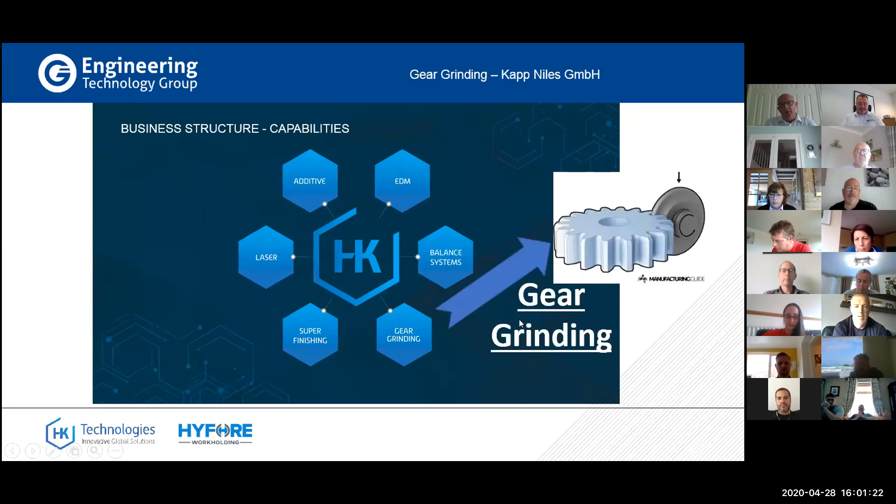Within HK Technology we have 6 core parts of the business: balance systems, EDM technologies, additive manufacture, laser marking, super finishing, and gear grinding. It's the gear grinding that I'd like to talk about this afternoon.

Our partner when it comes to gear grinding with HK Technologies is a company called Kapp Niles, a German company founded in Coburg in 1953. Now, for Graham Thomas's purposes, Coburg is also the birthplace of a certain Prince Albert, so I'm sure he'd like to visit there at some stage.

The second part of the business is the Niles part of Kapp Niles, which was founded in 1898. Niles ended up behind the Berlin Wall when Germany was split after the Second World War, and when the wall came down in the 90s, they found that under capitalism they struggled as a business, so they were purchased by Kapp in 1997, and the company Kapp Niles was founded.

The way the two businesses worked previously, Kapp used to produce gears up to a diameter of 1 metre, and Niles would produce gears above 1 metre. So by bringing the two companies together, you had a company which now offers a wide range of gears, from the smallest to the biggest capacity that's out there.

In 2017, Kapp Niles also founded a separate division of metrology, gear measurement. So from being a global market leader in the manufacture of machine tools and finishing tools of gears and profiles, by bringing in metrology they now become a total turnkey supplier for gear grinding. HK have been working with Kapp Niles since 1997.

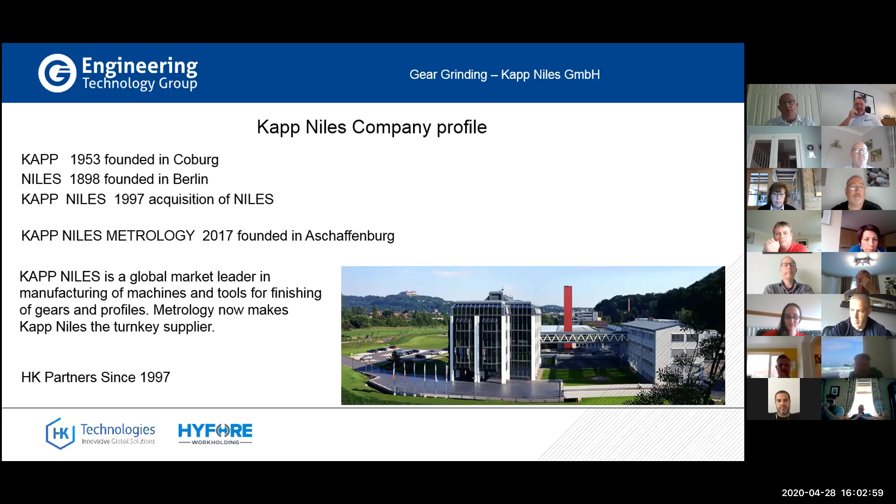So what is a gear? A gear is a wheel that works with other toothed wheels to alter the relation between the speed of a mechanism and its driven parts, the torque of a mechanism and its driven parts, or the direction of drive and force within a driven mechanism.

To put that into perspective, when you drive your car, if you want to go faster you change the gears. By driving through the system and changing the speed of the main driving parts, the smaller gears, you can alter the speed of the car. In the same way, by going down the gears, you can increase the torque from the car.

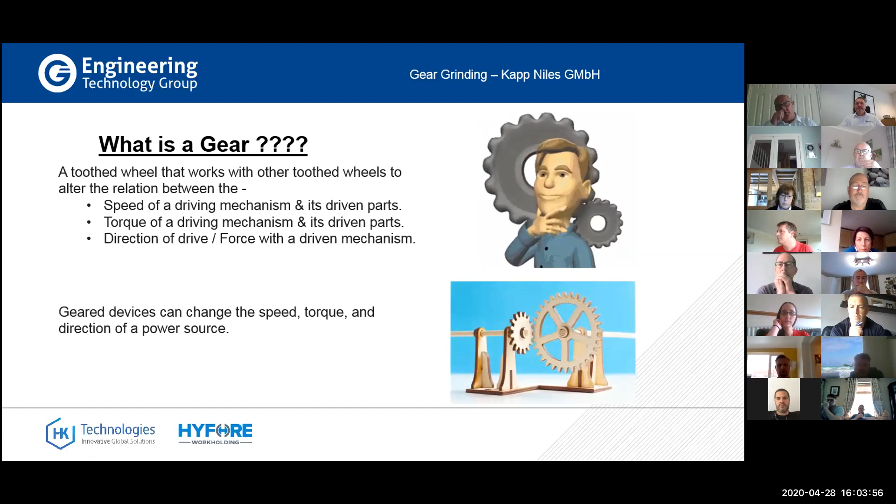Down the bottom here we also have a little animation which shows how we can use gears to change the direction of force within a driven mechanism. So gears can be used to change speed, torque, and force within a power source.

Just to give some examples of some types of gears. The most common gear is a spur gear, the simplest form of gear. It has parallel teeth, very good for transmitting high power, a lot of torque in spur gears. But once you get to high speeds, they tend to become very noisy.

So what was developed over the years is things like helical gears, where, as you can see here, the teeth are now, rather than being cut straight, at a helix angle, a slight angle. This means that when they mesh together, they run smoother and more quietly than standard spur gears, and so they tend to be one of the main developments that's happened in gears over the years.

As I said before, you can change speed of gears, and you can also change direction of force within gears. Other examples are the rack and pinion, which used to be standard in steering on cars in the past, using a change of direction, and also bevel gears, mitre gears and so on, where the direction of force is changed using gears.

Now, most of the gears you see in this example are what we call external gears, where the teeth are all on the outer circumference of the gear. Down the bottom here we also have an internal gear. It's not a very good diagram I'm afraid, but the teeth on this particular gear are shown internally, so the internal ring of this gear would actually make up the teeth on an internal gear. So just some examples of different types of gears that are out there.

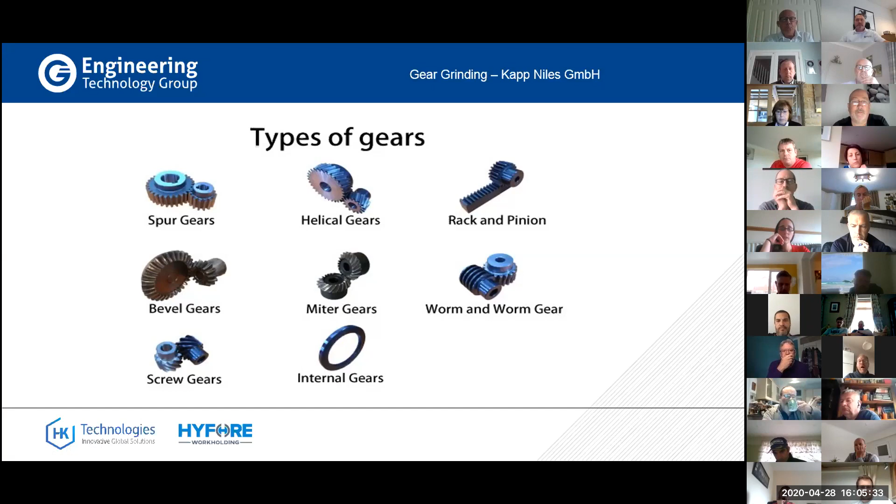So how are gears produced? Initially, from the solid, we produce what is known as a gear blank. This blanking operation can be done in several different ways: gear forming, milling, broaching, skiving, hobbing, even wire EDM. I think as we move forward, additive manufacture will become more and more relevant in the process of manufacturing gears.

Gears can also be ground from solid if they're small gears, but it's a very slow, very expensive process, so it's not that common, though it can be done. Once we produce the blank from the gear using any of these processes, the next step is to finish the gear, and this is done by gear grinding.

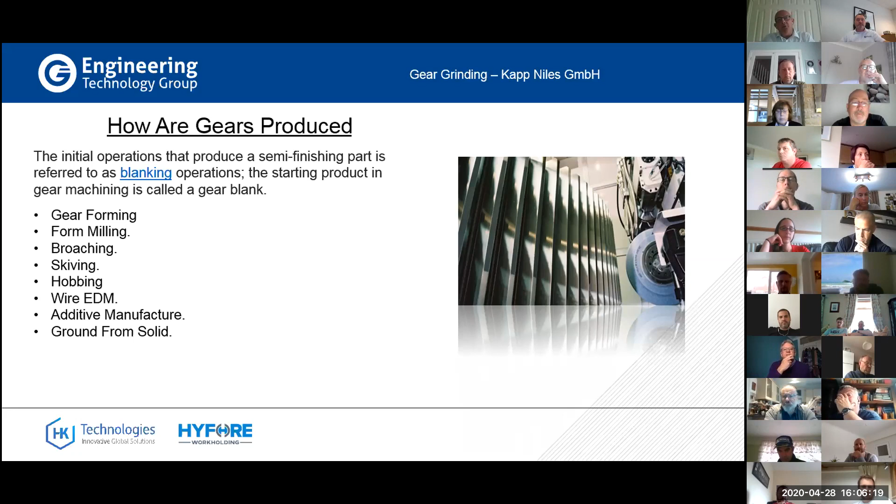But why do we grind the gears? Gear grinding is a way of producing finished gears through an abrasive process. Small pieces are removed each time, so we're not removing massive amounts of stock, which means it doesn't affect the overall integrity of the material the gear is produced from. Gear grinding also ensures proper creation of gear teeth, so the gear geometry is produced to the standard we want.

The main benefits of grinding gears are better geometry, so the gears mesh together more effectively - this is how the two teeth come together on the gears. There's also more stable operation - we don't want gearboxes that are clanky. Grinding also allows gears to manage greater loads and gives a longer life.

One of the key points moving forward, especially with the development of electric vehicles, is quieter gearboxes. As we start to lose engine noise, we can't rely on it to hide other noises from the gears, so it becomes more important that we produce quieter gears.

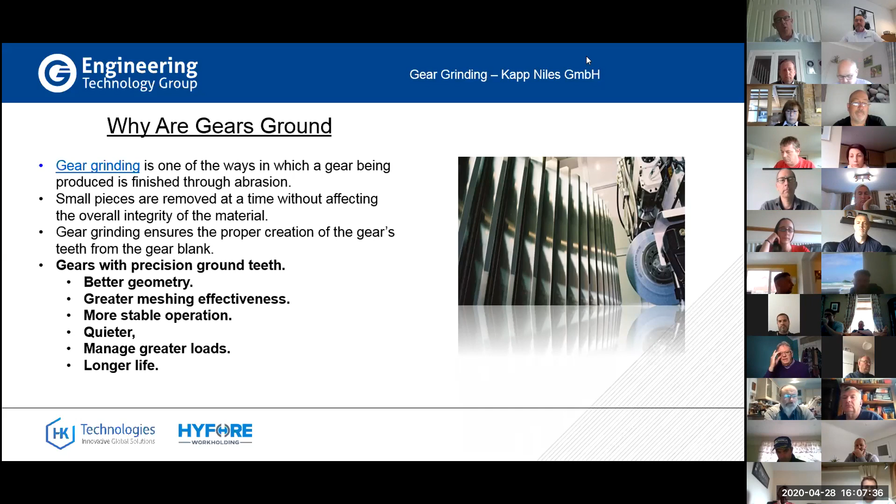So how are gears produced? There are two basic methods used in gear production. The first is generating grinding, where we use a grinding worm, as seen on the left-hand side of the screen. This meshes with the gear blank, and the two move simultaneously, with the abrasive action of the worm grinding the gear. We've got two examples here, and I'll come back to why in a moment.

The second process is profile grinding. This uses an individual wheel where we grind each tooth individually - the tooth is ground, the wheel is withdrawn, the part is indexed, and the next tooth is then ground. With profile grinding, we can grind not only external gears but also, as shown in the diagram, internal gears.

You'll notice on the diagram we have two different coloured wheels, and here we have a key showing dressable and non-dressable tools. So what's the difference? A dressable tool is one that can be reprofiled within the machine. As the worm or profile grinding wheel grinds the gear, it takes damage itself and starts to lose its own form and profile. With a dressable tool, we're able to redress that particular tool within the machine itself.

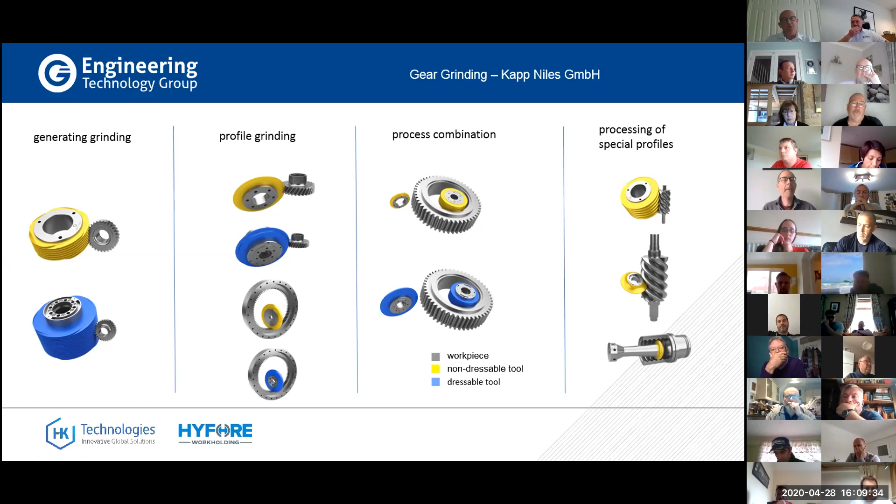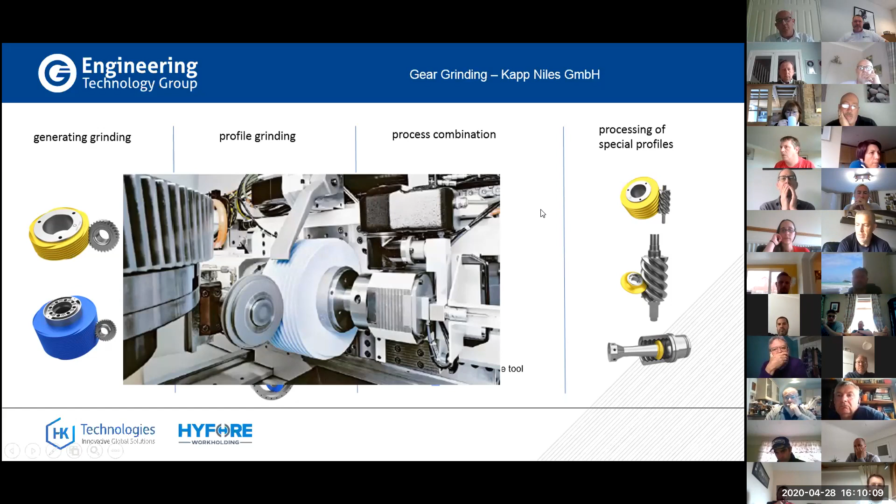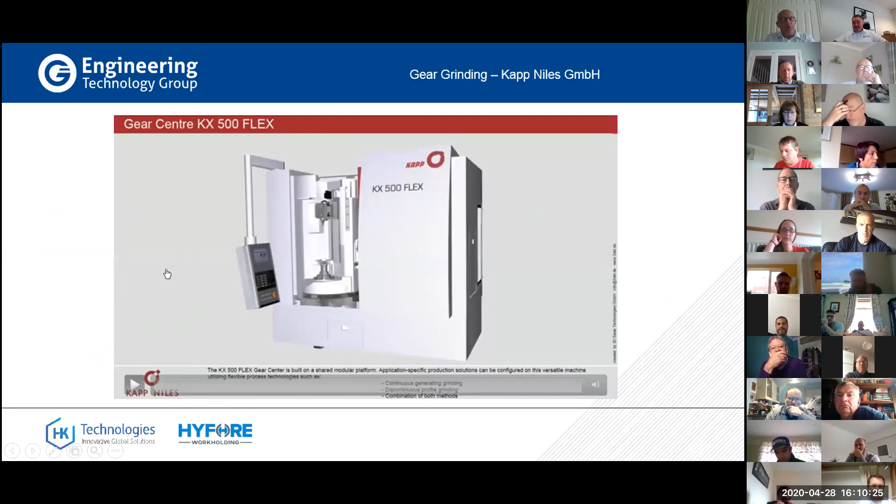To give an example of generating grinding, there's a little animation here from Kapp. The KX500 machine shown is actually capable of both generating grinding and profile grinding, but in this particular example we're going to look at generating grinding.

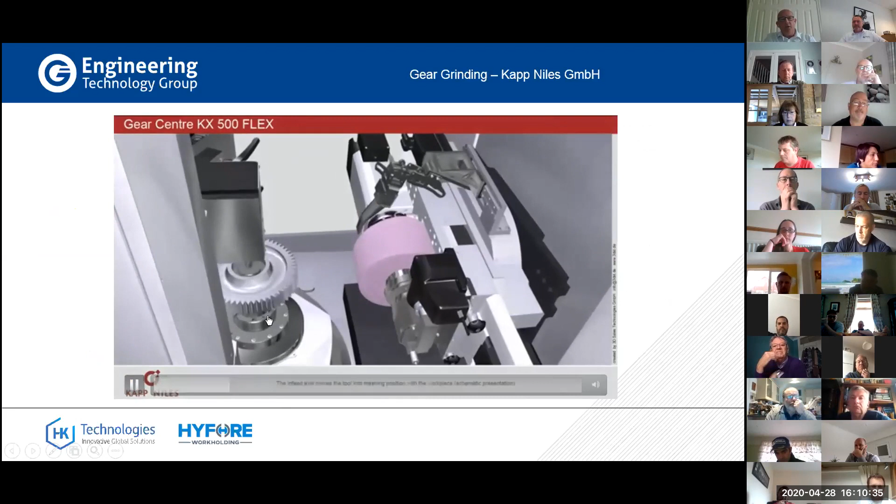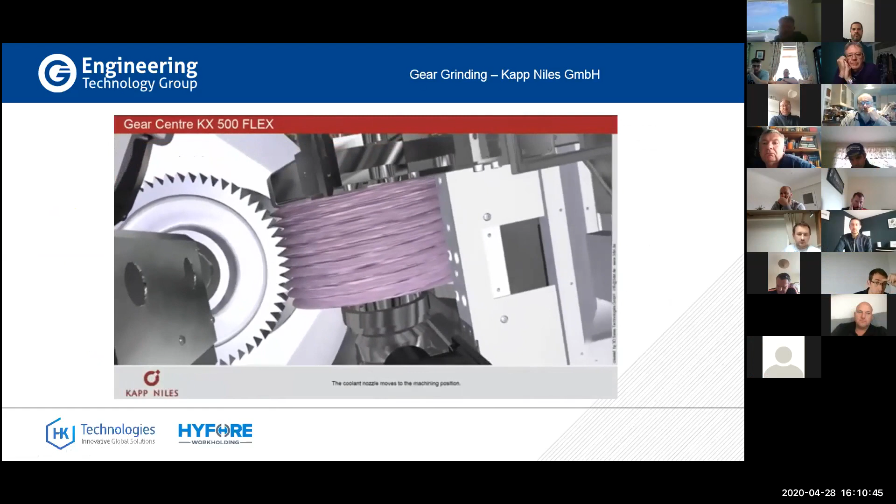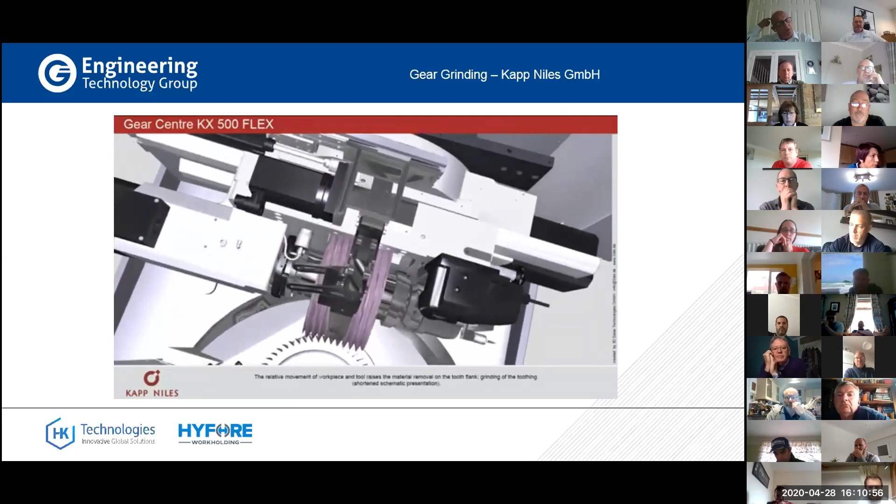We can see the parts of the gear, or gear blank, on the left-hand side, and over here the generating wheel. You see the two mesh together, and as they turn simultaneously, that moving part would normally be the lubricant being applied. Now the gear grind is taking place with the two parts meshing together - the part is rotating continuously, as is the grinding wheel. That's the process of generating grinding.

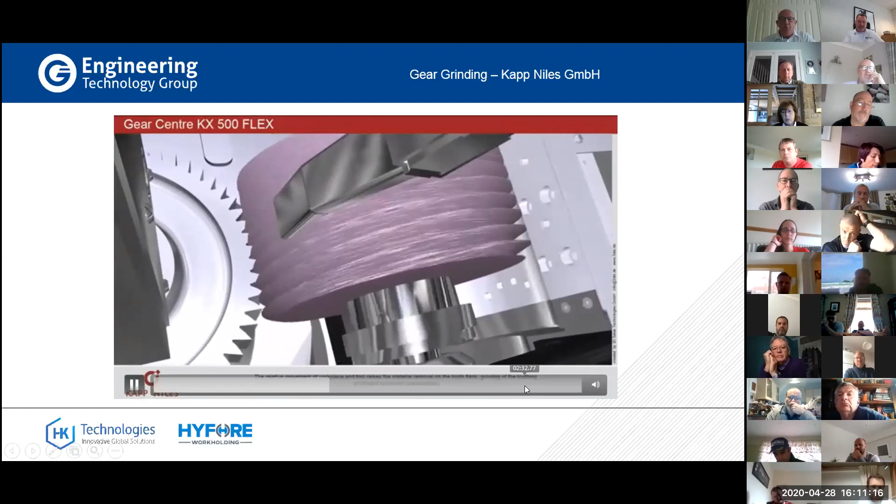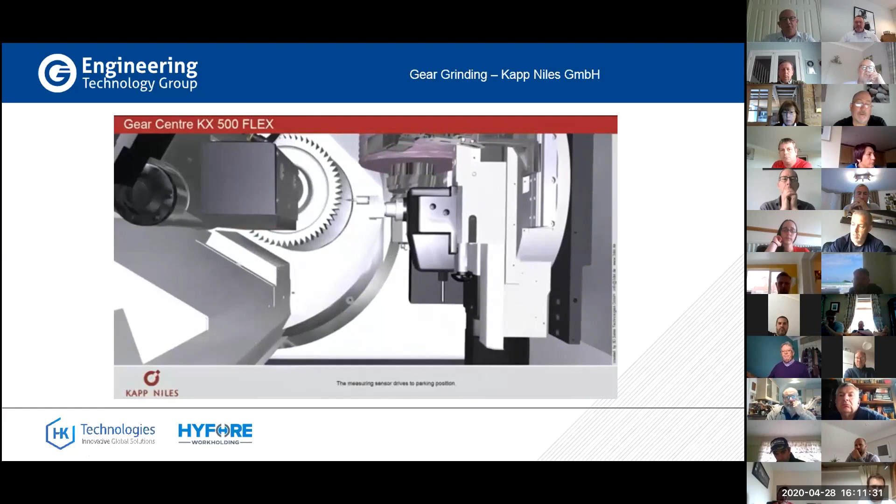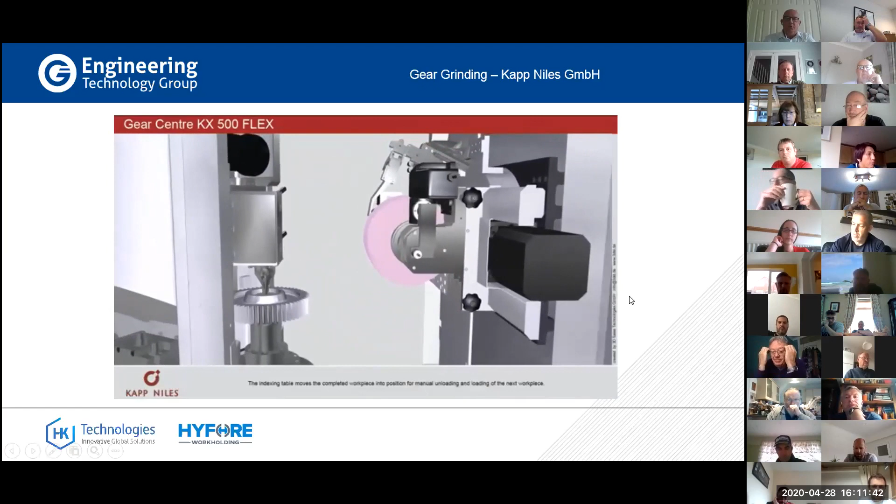With any of the grinding processes, we normally finish off with a check on the gear. All the machines offer internal checking for the gear, so once the process is finished, we can check the gear with a Renishaw probe before it's removed from the machine. That's the generating grinding process.

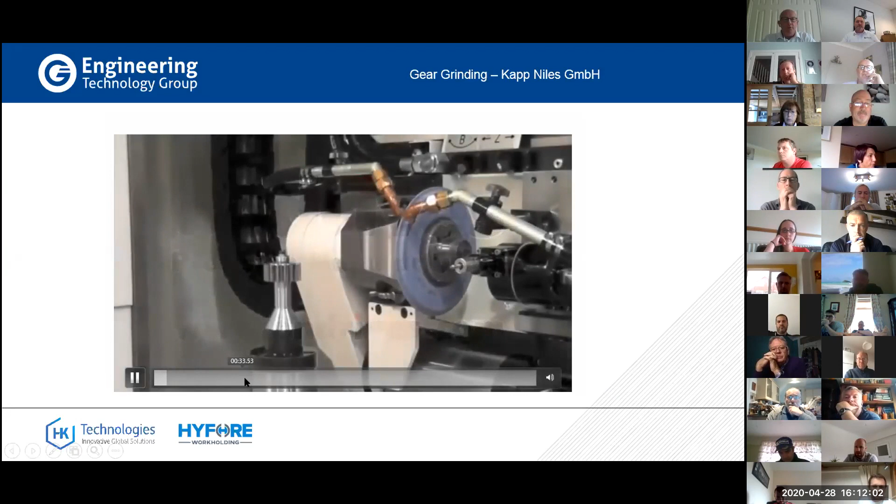You'll see now that rather than a worm wheel, we have an individual wheel. This wheel is going to cut into the individual tooth, grind that tooth, and then move on to the next tooth. The part will rotate and the wheel will be brought back in again. I think we can get a close up on that, so I'll jump into there so you can see it closer up.

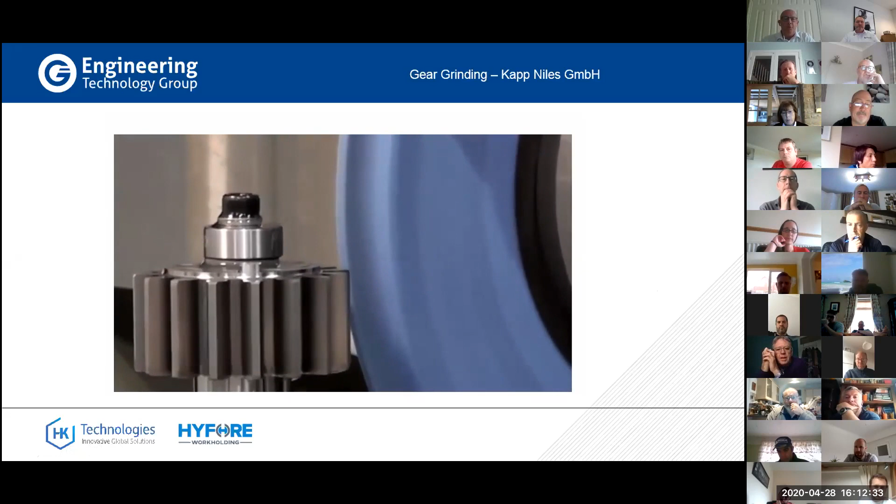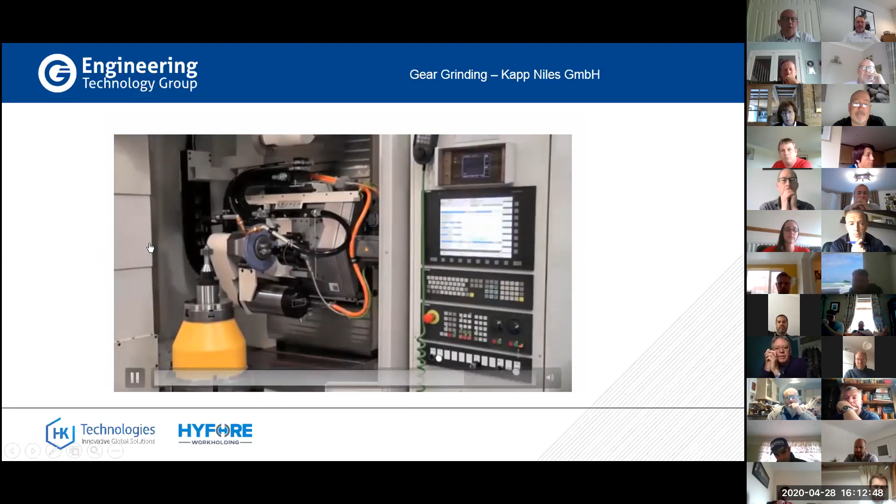Again, once it's moved, the part is rotated and the wheel is brought back into contact with the part. And at the end of the process, we have the Renishaw probe again, which we can bring in to check the profile of the gear.

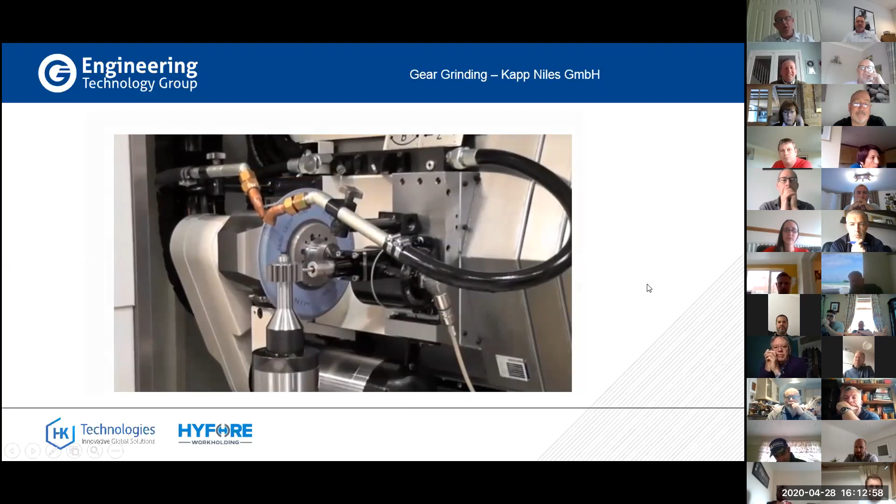So those are the two main types of gear grinding used, and they both have certain limitations. Generating grinding, as a maximum, we can do gears from 8 millimeters up to 1.25 meters. Profile grinding, we can actually go up to gears of 8 meters, an example of which you can see on the side over here. Generating grinding is a far quicker process than profile grinding, but profile grinding has the advantage of producing better quality gears. So you've got the trade-off of one against the other.

So when you look at automotive products, the likes of Audi or VW, where they're producing massive amounts of gears, the generating grinding profile is the way they tend to go with that. When you're looking at things like high-end motorsports or aerospace products, that's when you look at the profile grinding setup for that type of production.

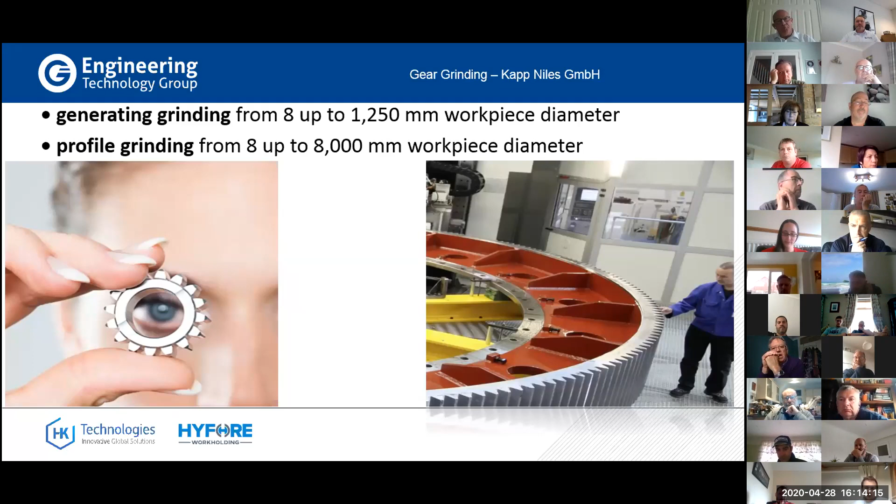So what I'll do now is go through the machines in the range. It's quite an extensive range of products, as you can imagine, when we've got a capacity from 8 millimeters right the way up to over 8 meters. I'll skip through these fairly quickly so you've got an idea of what we've got within the range. We'll start with the generating grinding machines.

The KNG 3P and the KNG Expert. The first thing I want to point out on these is any machines with KNG at the start - this is Kapp Niles' new gear grinding technology, called KN Grind technology. It's a new programming system they're starting to introduce to the machines in the range over the coming years. Machines like the KNG 3P and the KNG Expert already have this new technology, but it will be introduced to others in the range as we move forward.

So the KNG 3P Ready is an entry-level machine, ideal for job shops, small to medium batch work. As you can see, it's very limited in size, with 320mm capacity in tip diameter.

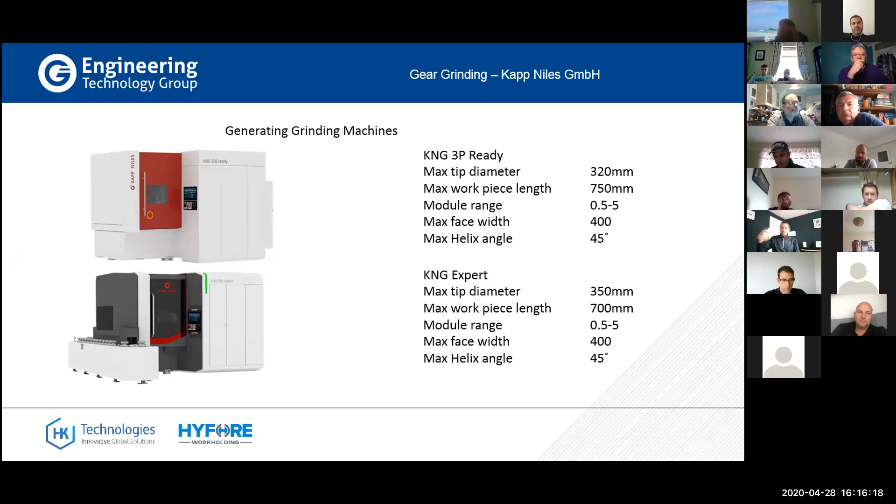The KNG Expert is then a step up from this, and we start to get automation - a conveyor loading system within the machine, fed in with a pick and place robot, or a revolving spindle inside the machine. The gear is picked up off the conveyor, placed onto the working area and the spindle, and rotates back round once the part is finished. So we've got automation within the machine, and we're now looking at a higher level of production volume than the KNG 3P machine.

The KX series of machines are also generating grinding machines, developed specifically with the automotive industry in mind. The KX Dynamic machine has integrated loading and unloading within the machine, and the part is loaded directly onto the spindle, which then enters the work area already accelerated. So as the spindle comes in, we're not waiting for it to start - the contact with the driving worm is instantaneous, and the grinding process starts straight away.

Taking that to an even higher level of production, the KX Twin series has twin spindles, so we're not waiting for one job to finish while loading the second part. The rotating table has two working spindles, so as one part is being finished, the next part is brought straight into the work area and can be processed straight away - high levels of production with these machines.

There's a third option on this - we've got the HS, a high-speed spindle option, which can also be used with very small wheels down to 55 millimeters, producing smaller parts.

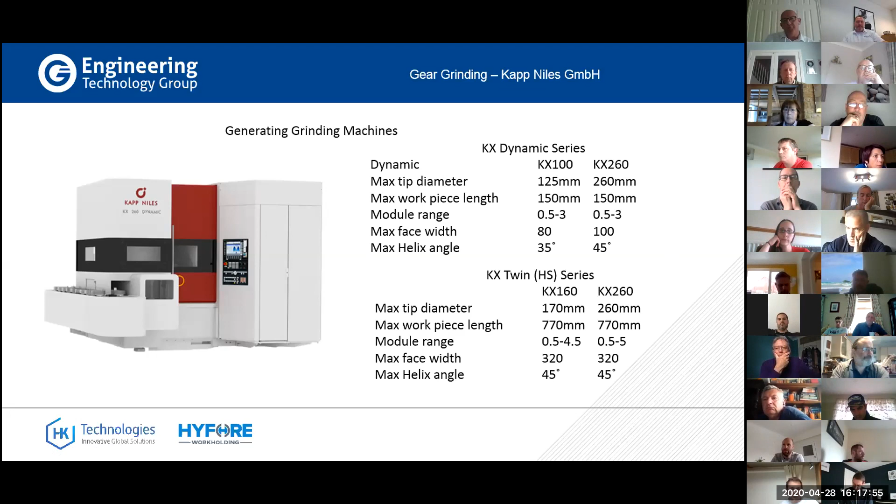So to move on to the profile grinding products, again we have an entry-level product, the KNG 320.

This is an entry-level machine, less than 500,000 euros. The machine is delivered pretty much intact, it's a plug-and-play type machine, ideal for job shops, for people who are just getting into gear grinding, maybe want to bring it in-house for the first time. The limitation on this machine is it will do external gears only - you've not got the possibility for doing profile grinding for internal gears on this particular machine.

The ZE series machine is a step up from this, and this was the machine you would have seen in that video earlier on from On Drives - the ZE 400 machine. This offers you internal and external grinding, very high precision in terms of the parts produced, and is ideal for prototype and very low volume work. Your general job shop, gear grinding, gear producing job shop will use this type of machine.

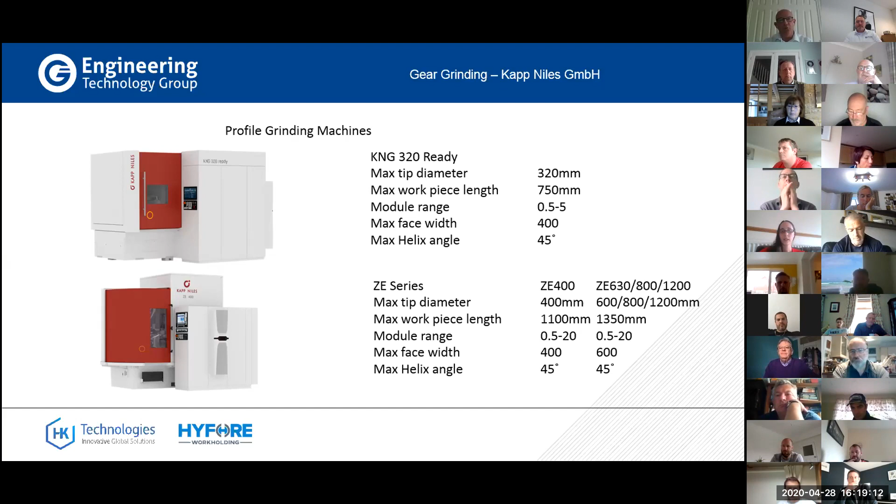So if we move up now in terms of profile grinding to the larger machines, we're starting to move up to machines that may be used for things like the gears driving a submarine, or gears driving a large frigate or other marine vehicle, or even some of the large earth-moving machines you may get in quarries and things like that.

Then you would move to gears of the size that can be produced on the 10P Master and the 12P Master. These gears are up to 1.25 meters, but we can get bigger than that. They're still very high precision gears because of profile grinding, and we're able to produce these for both internal and external gears.

The KNG, as I said before, means we've got the new KN Grind software on this machine. The KNG P Master gives you all-round performance, but for a very, very large type of gear.

So the next one up, and the largest we can go to, is the ZP series machines. Now these are really big machines, especially when you're going up to gears of 8 meters. I will show you a little animation in a bit of these 8 meter machines. Again, we can do internal and external machining on these gears, and we can produce them to very high quality. The type of gears that might be produced on this are those used on wind turbines, and again, some very large earth-moving machines.

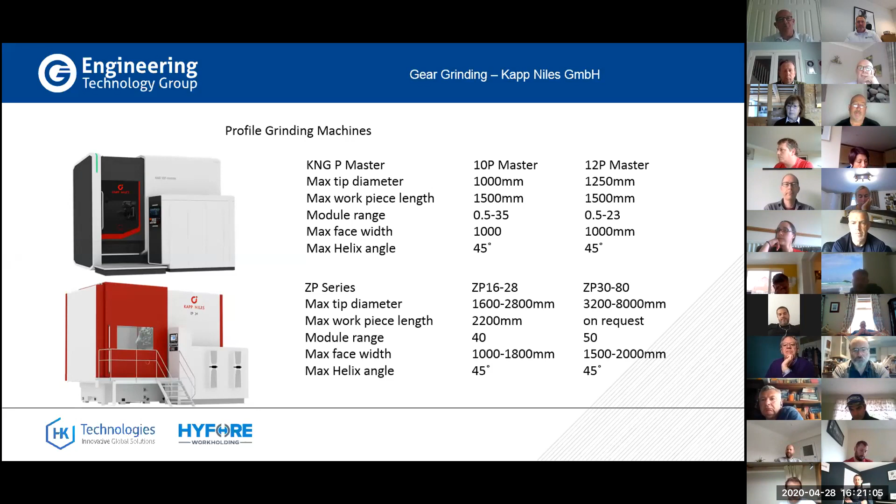So next, if we look at the VX series machines - again, we can do internal and external gears on these. We can cut straight gears, helical gears. They're very, very versatile. The other thing on a VX machine, and this is why they're quite often used in aerospace, is it's profile grinding, so it's high quality. But we've also got the facility to grind multiple gears in one setup. So where we have something like a shaft with 3 pinions on it, that can be machined in one setup on the VX machine. We have these in certain aerospace producers in the West Midlands area, so it's a very, very proven and very high quality machine.

The RX machines are specific to either rotors for pumps, compressors, or ball screws. That's all these particular machines are designed to do. Quite a small market, but we do have those within the portfolio as well.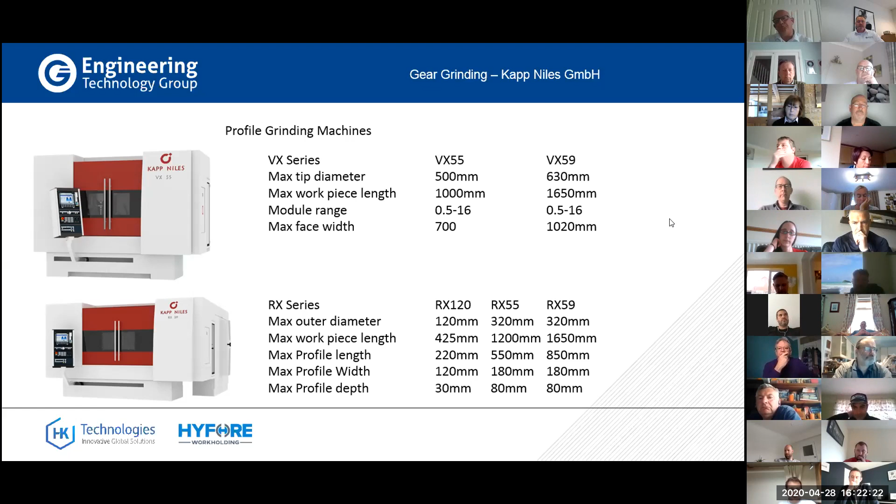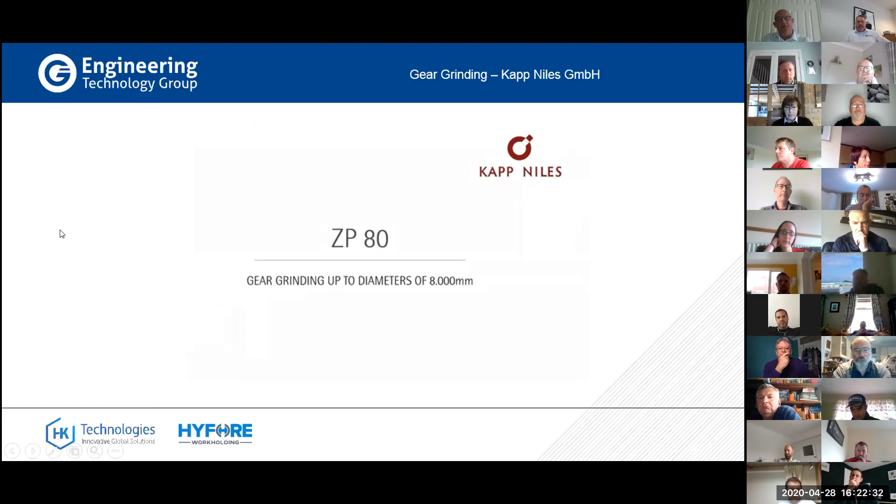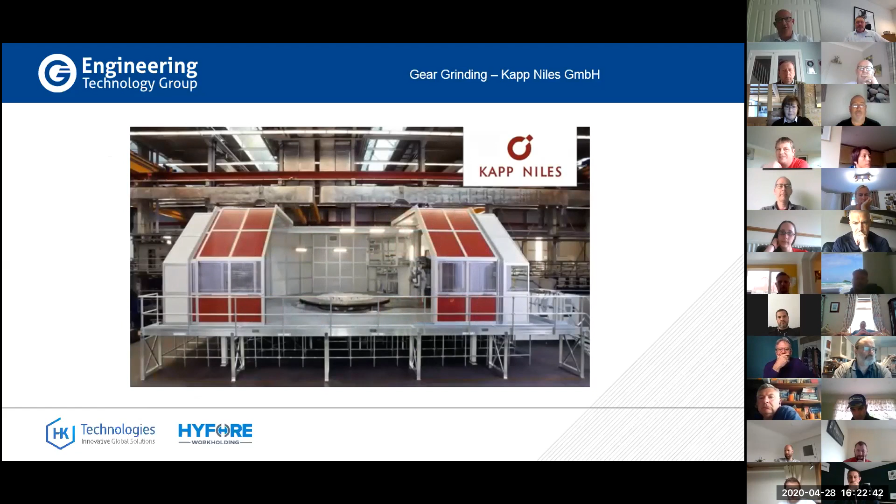So the ZP machine, the ZP80 I mentioned earlier, this is the big gear machine. This is just to give you an idea of what they actually look like and how big they are. Really, it's a small house rather than a piece of engineering machinery. As you can see, it opens fully up so that any parts there can be craned in. And as it says at the end of that, it's pretty unique as a product out there in the marketplace.

But finally, before we move on, we then have the gear centers. These are the maximum flexibility that Kapp can put within their machine. With these machines, we can do generating grinding and profile grinding. We have high-end productivity in terms of the quality of the gear produced. We can do internal grinding and external grinding, so they have total versatility. The other thing with these is the ease with which you can swap from one process to the other.

It doesn't take hours and hours. It's a fairly quick process, in terms of 20-30 minutes, to change from profile grinding to generating grinding, from internal to external grinding, etc. The KX Flex machine is the most flexible machine, even by the ZX standard.

This is taking it to the next level. So now with this machine we can do internal, external, profile grinding, and we can also grind gears which have interfering edges. In other words, where you have a herringbone gear with two helix angles coming from opposite directions, we can now machine gears like this on the Flex. So the Flex machine is the most flexible machine, as the name suggests, in the marketplace at the moment.

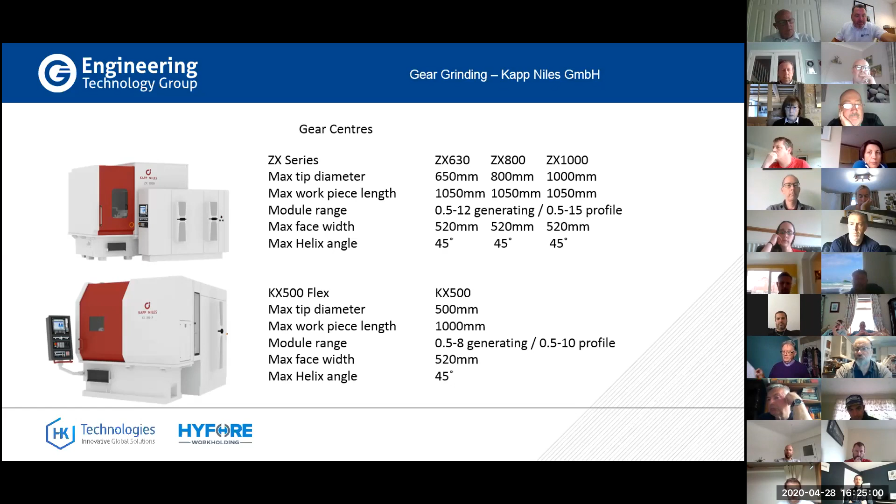So industrial sectors that operate in aerospace, which I've mentioned on several occasions - we have several customers in the UK. Aerospace, automotive - Kapp have machines in a lot of the usual automotive suppliers such as Audi, BMW, etc. And that's where the majority of the generating grinding machines, the KX machines, are in place.

A lot in China as well for those particular markets. With agriculture, you've got some of the big tractors and combine machines, so you're getting up to some of the big gears - 800 millimeter gears that you can be putting into those sort of machines. And then when we come onto mining, you're talking about the 1.2, 1.5 size machines.

The other industry in the UK which we have lots of machines in is the drive and motorsport area. So companies like Xtrac and Hewland have several Kapp machines, all based around the profile grinding technology because of the quality of the gears. That's one of the strongest areas that we have in the UK. Worldwide, all of those markets are covered within the Kapp portfolio.

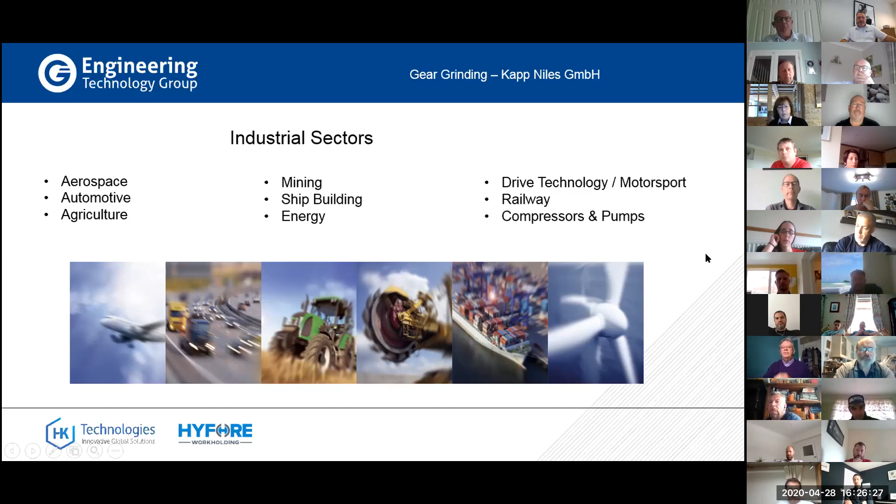So why Kapp Niles? As I mentioned before, they're a world-leading brand. They sell over 140 machines on average every year across the world. They have a range of machines which goes from the smallest, highest level production machines up to being able to produce massive 8-meter plus gears.

They have industry-leading reference customers. Now, a lot of the customers that Kapp Niles are in, I can't really share on this presentation because of NDAs, but if you want me to give you a list of those privately to talk to your customers, then I can do that.

The machines are high-end accuracy. We can produce gears to a DIN 1 standard. The DIN 3962 standard is the German gear standard. DIN 1 standard is what we call a reference gear, so this is top quality gear. To give you an idea, gears in your car would be somewhere around a DIN 6 to 7 standard. So we can produce top-end gears.

The reason they do this - they still hand scrape guideways on the machine, which gives the machines great accuracy. And as I mentioned before, every machine has in-machine measurement, so as a gear is being produced, we can check those gears before they come out of the machine.

The Kapp machines are ergonomically designed. So for manual loading, we have the facility - with the ZE machines, for example, they tend to be with the work area about waist height for people to be able to load and unload, and those that are slightly higher, they put steps on those. So again, people aren't having to lean into the machine to load the parts. Crane loading and unloading is also available with machines.

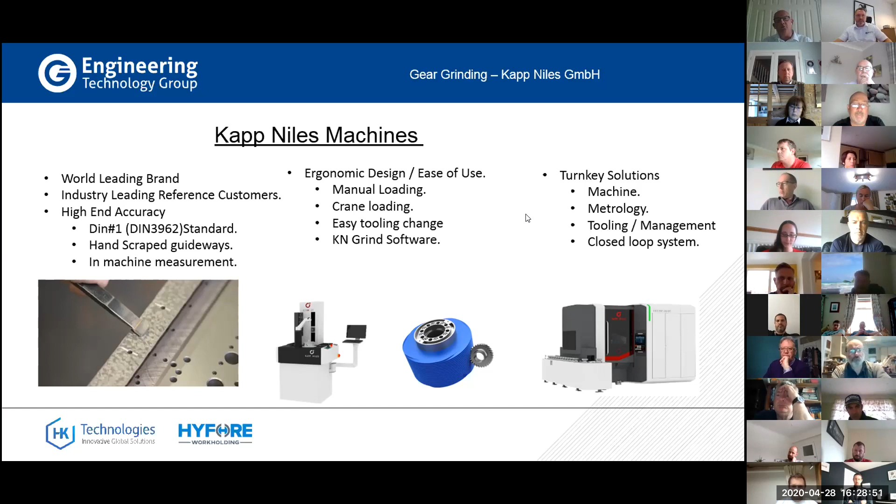So in gear grinding, closed loop system, using the KN Grind technology - we have the machine, we grind the workpiece, and each workpiece is given a QR code to identify it. We're using the Kapp gear measurement machines. We import the measure program with the relevant information to the gear that we're measuring, and we can bring that gear across to measure it on the gear measurement machine. Once we've measured that, it is then stored in the file as a GDE file.

Now, the GDE file is a gear data exchange file, which can then be fed back into the machine. So once that data is fed back, we've taken the sample gear, tested it on the gear measurement machine, and fed the GDE information back into the machine. What the machine can then do is automatically correct the production to take out any deviations.

Now, there is an error on this slide, but it's Kapp's own slide, so I haven't changed it. It should read that the deviation is outside the predefined range. So where we have a deviation outside that range, the machine will automatically adjust the process to compensate and bring the workpiece back inside that predefined range. That's what we call a closed loop system with a KN grind system.

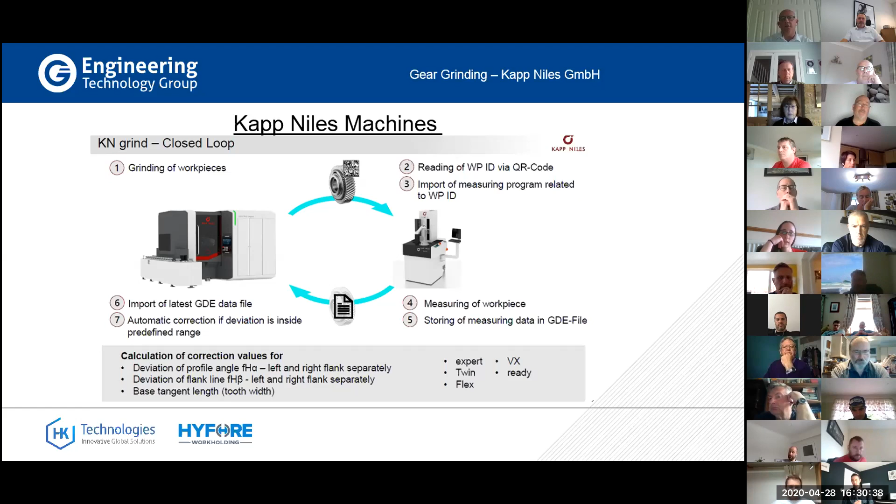What sort of information is useful for us to find out from a customer who may be interested in talking to us about gear grinding? Some quick questions: size of the parts, the diameter of the parts, and the module. The module of the part is basically the diameter of the part divided by the number of teeth. We mentioned on each machine the gear module - that's what a module of a gear is. Simple piece of maths, but it's one thing the engineers ask for.

Volume, parts per week - is it high volume, low volume? So we start to think about whether it's generating grinding, or if it's low volume profile grinding. Do they want internal or external gears, or both? Drawing of the parts, the material, the type and hardness, and whether or not there's any automation within there. Those are the sort of things that are useful information to bring back before we talk to the customer about gear grinding.

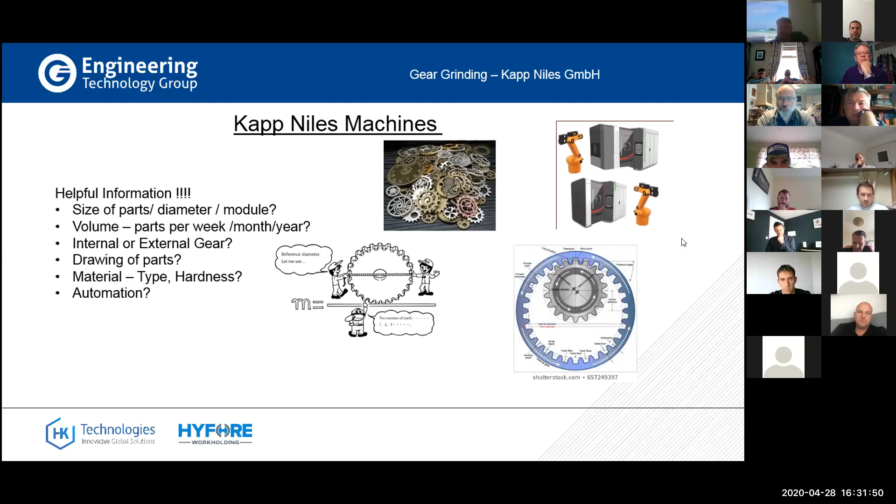So just to finish on, I'd like to run a quick video which shows the KNG 350 machine doing generating grinding, showing the processes we've just been through within the presentation.

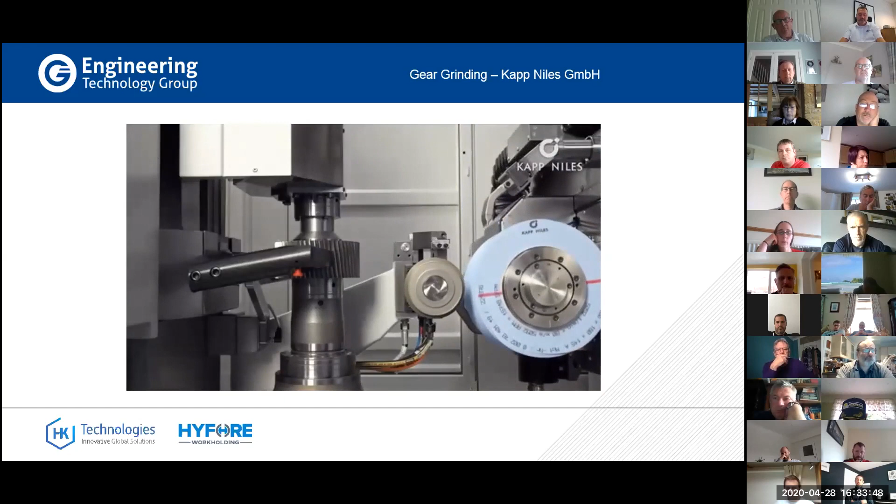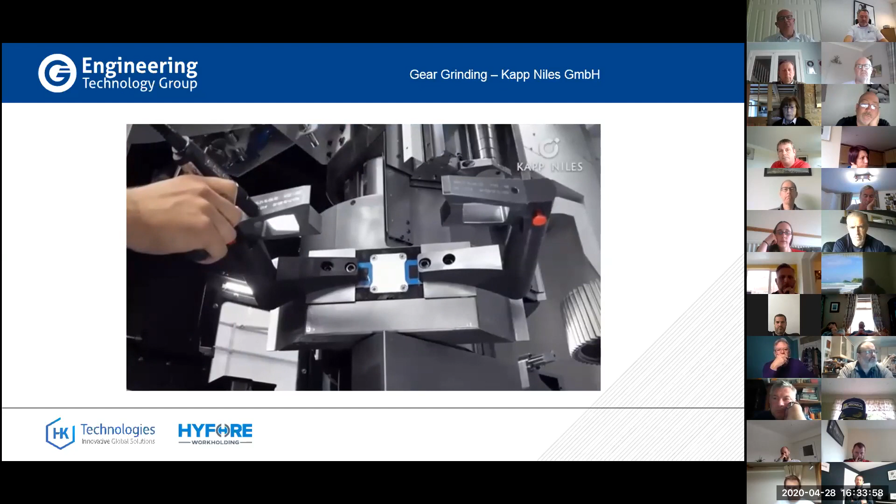So it just shows you the KNG 350 machine in operation, generating grinding, but also how easy it is to change the tooling, and a bit of the closed loop system in terms of the gear measurement.

So that's it for gear grinding. Thank you for your attention, and any questions?

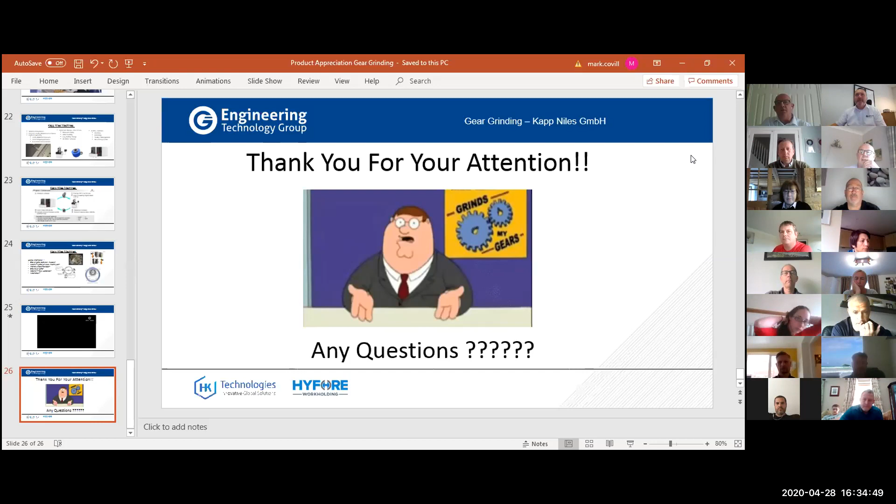That was really good, Mark. Thanks a lot for that. There's a lot goes into a gear - we take it for granted, I think. I'm going to unshare your screen. Excuse me, where do I get that to? Oh yeah, I'll do it for you, shall I? There you go. Well, thank you.

So chat's open, guys. Anyone got any questions for Mark regarding gear grinding or Kapp Niles? No questions again. Derek, where are you? Oh yeah, Steve Brown's got one, has he? Yeah, Derek will always have one - that's his old faithful, isn't he? Go on then, Derek, still learning, man. Fair play, Mark, thanks so much for that.

Very good, thank you. Mark, is there different types of grinding wheels for different materials? There's different types of grinding wheels in terms of the fact that you've got...

Yeah, all right, thanks buddy. Good one, Derek. Steve Brown. Good one, Mark, well done mate.